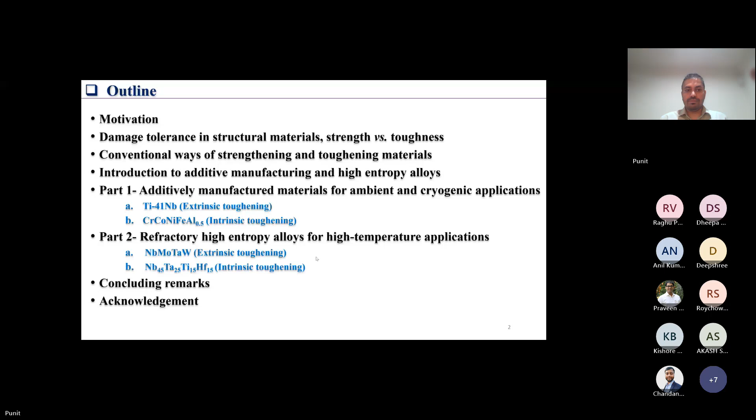So why do we want to discover new structural materials? What are the requirements and applications where we need these structural materials, where existing materials are not sufficient?

If I want to give an example of a cryogenic temperature application, one of the foremost would be rocket engines, which operate at cryogenic temperatures because you need to store both oxidizers and fuels below their boiling point. For example, methane has a boiling point of about 111 Kelvin, and oxygen has a boiling point of about 90 Kelvin. At the same time, these fuels also apply some pressure on the fuel tank.

If you are making a fuel tank of rockets or cryogenic engines, you need to store fuel at really cryogenic temperatures. So the structural material should be able to withstand those cryogenic temperatures as well as the pressures. Other than that, if we want to use green hydrogen, the most efficient way to store and transport it is also in liquid form. So that's going to be a popular place where we need structural materials which can survive cryogenic temperatures.

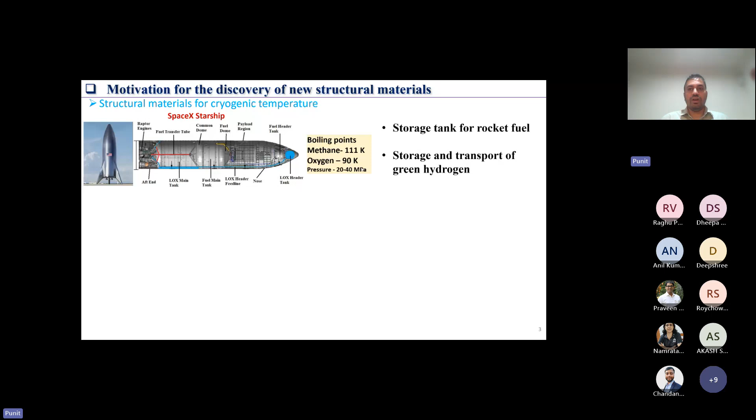Even recently, Rolls-Royce is trying to develop jet engines that use green hydrogen, and they've realized they can only store these fuels at cryogenic temperatures for the most fuel efficient jet engines. So they're also looking into structural materials which can survive both cryogenic temperatures and embrittlement from hydrogen. The second example I want to give is about high temperature structural materials, and the foremost example of that would be the jet engine.

Most of us know that if we run the jet engine at higher temperature, the hotter the better, the jet engine will be more fuel efficient because of the Carnot equation. If we look at the development of materials used in jet engines, in the beginning we were able to discover newer structural materials that could survive more and more, or higher, temperatures.

Because of that, we were able to follow this line of ideal performance. But in the last 50 years, the better engines we've developed have come through cooling technologies, such as internal channels or thermal barrier coats, not through new materials, so there is an inefficiency loss. If we want to reduce this inefficiency loss and develop fuel efficient jet engines, we have to come up with newer structural materials that can survive these extreme temperatures.

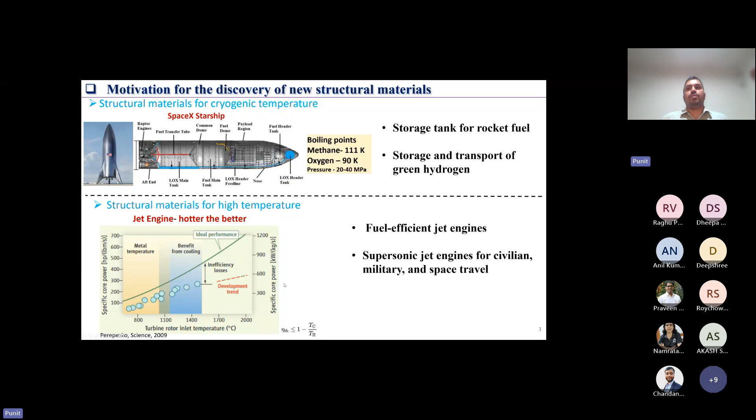So these structural materials would also be suitable for supersonic jet engines, which can be used for civilian, military, as well as space travel. So if we want to develop structural materials for these extreme conditions, what do we need in these materials?

These materials should be damage tolerant. When I say damage tolerant, what does it mean? It means the materials should be strong, which means they should be resistant to plastic deformation, and these materials should also be tough, which means they should be able to resist fracture.

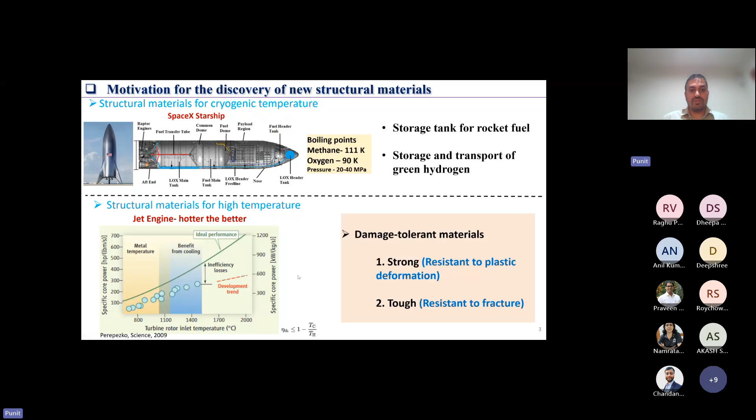So if we talk about fracture, or how materials fracture, we can take the basic idea of the Rice and Thompson model, where they say that if you have a crack and you apply stresses at the crack tip, and in that case you break an atomic bond ahead of the crack tip, it means your material will fracture, or the crack will grow inside the material. So this is the basic idea of fracture.

But if we look inside metals and alloys, and extend the same model to these materials, when you apply a stress at the crack tip, instead of breaking an atomic bond, you emit a dislocation from the crack tip, or if you have a dislocation source ahead of the crack tip, it will emit a dislocation that ends on the crack tip. When you emit a dislocation, or have dislocation activity at the crack tip, your crack tip becomes blunted, and you need to apply even higher stresses to grow the crack.

So this is the origin of the strength versus toughness trade-off that we usually see in metallic materials. For example, if you have materials with higher yield strength, it means you will have lower dislocation activity at the crack tip, and that means lower fracture toughness. At the same time, materials with lower yield strength will have more dislocation activity at the crack tip, and those materials will have higher fracture toughness.

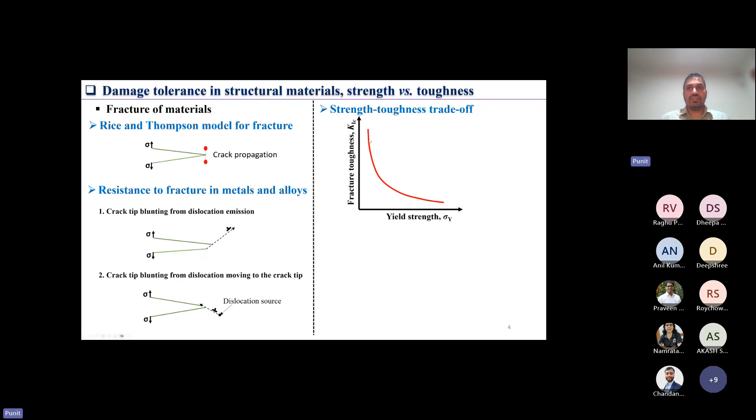We can also divide these further into two broad categories. There are many exceptions, but broadly we can divide into BCC alloys, because the material is not close packed, nucleation or movement of dislocations or other defects is slightly more difficult compared to FCC materials, and that's why these materials have higher yield strength but lower fracture resistance.

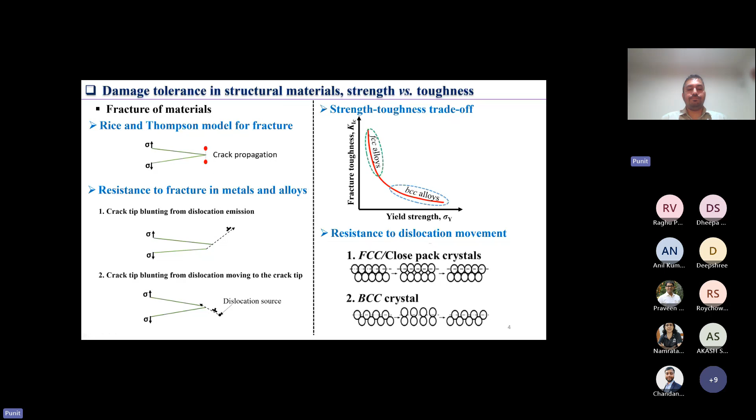At the same time, FCC alloys, which have these close-packed crystals, in those materials it would be easier to nucleate and move dislocations, and that's why we have higher fracture resistance but low yield strength. So if we talk about conventional ways of developing new alloys, or alloy development, there are different types of alloys we want to develop.

So if we want to develop FCC alloys, the strategy we need is to increase their yield strength without affecting the fracture resistance.

Conventional ways of achieving this: the first one I want to highlight is precipitation strengthening. What you can do is put precipitates inside the material, which can block the movement of dislocations, and you can increase the strength of the material.

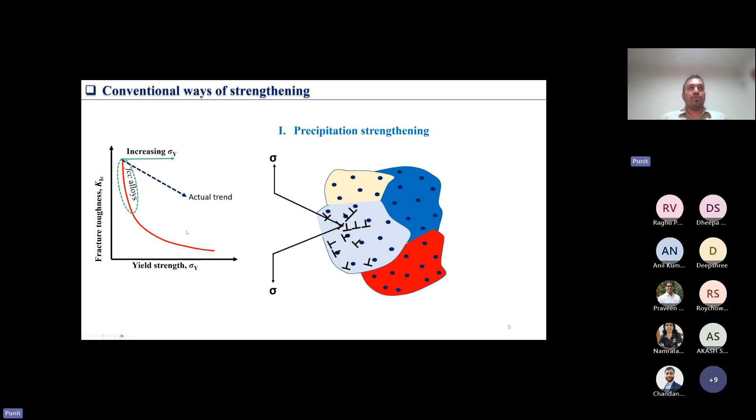But at the same time, if you have a crack inside these materials, these precipitates would also block the movement of dislocations. Because of that, you want to achieve this type of property improvement, but the actual trend is that while you increase the yield strength, you also see losses in the fracture resistance of the material.

The second way we can achieve strengthening of FCC alloys is through grain refinement via material processing. There are two possibilities here. For example, your grain boundary can block the movement of dislocations, which increases the strength through the Hall-Petch mechanism.

At the same time, you can nucleate a different slip system in the neighboring grain, and by doing that you can spread the deformation, plasticity, or damage away from the crack tip through this route. This usually happens if you have grain boundaries that are low angle grain boundaries.

In comparison, if you have grain boundaries that are high angle and don't allow transmission of dislocations across the boundary, or activation of newer slip systems in the neighboring grain, in those cases you might be nucleating micro voids on the grain boundary. So there are two possibilities in this case.

You can in some cases improve the yield strength without significantly affecting the fracture resistance, but in some cases you will be affecting the fracture resistance. Also, it's very difficult to control the characteristics of grain boundaries through existing metallic processing we have. So that's another challenge when we want to design newer materials with higher strength and higher fracture resistance.

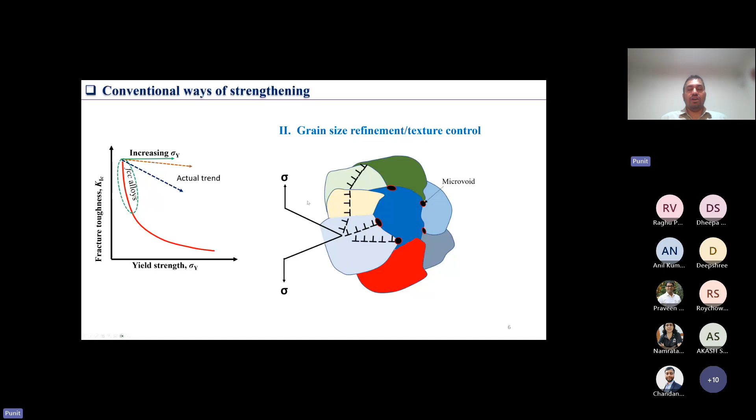In case of BCC materials, what we want to do is increase their fracture resistance without affecting the yield strength. There are usually two ways we can achieve this in BCC materials.

We can have extrinsic toughening from tortuosity of the crack path. Usually BCC materials fracture by cleavage fracture or intergranular fracture, and if you have a crack path which is tilted or twisted, you can have higher fracture resistance in this material.

Although these improvements in fracture toughness from extrinsic mechanisms are not as much as what you can achieve through intrinsic toughening. So in BCC alloys you can also have some intrinsic toughening by compositional modulation that can allow defect nucleation or movement of defects.

For example, in tungsten, if you add more and more rhenium, you can ductilize tungsten. So those mechanisms also work in improving fracture resistance of BCC materials, but the problem is that you will also be affecting the yield strength of these materials.

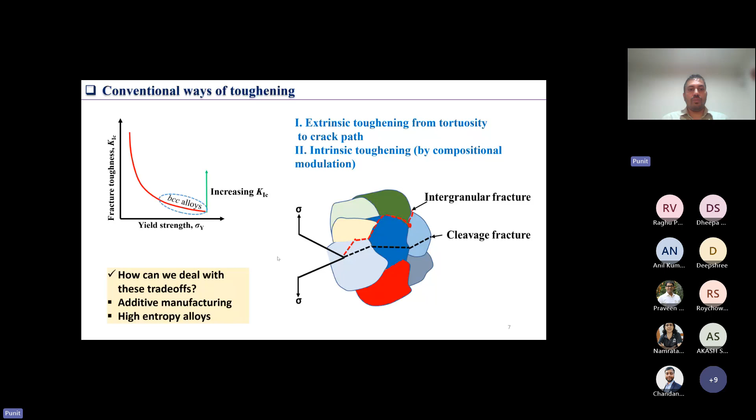So what I want to talk about today is how we can deal with these trade-offs using relatively newer technologies such as additive manufacturing or high entropy alloys. This is where I want to briefly introduce these two topics before getting into the main body of my presentation.

The method I want to talk about today for additively manufactured materials is the laser powder bed fusion process. I'm aware most of you might already be familiar with this.

Most of you might be aware of this methodology, so I will briefly go through this additive manufacturing process.

In laser powder bed fusion process, you take a laser beam and melt the material line by line, layer by layer, building a 3D part. You have a powder delivery system where you spread the powder on the powder bed, and use a scanner to selectively melt the material, getting a final 3D component by lowering the powder bed layer by layer.

There are several process parameters that are important in this additive manufacturing process. For example, laser power, how much power you are giving to the material during the process, decides how much material you are melting in each line.

Another processing parameter is layer thickness - the thickness by which you are spreading the powder and melting the material in each layer. Then there's hatch spacing, which is the spacing between two subsequent lines of the laser scans.

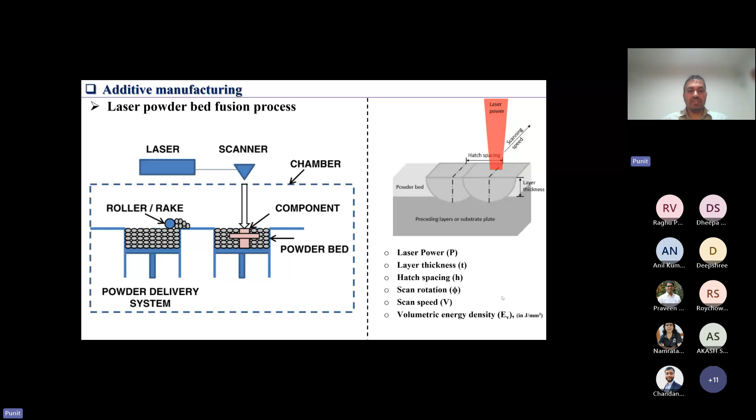There is a parameter called volumetric energy density, which is a combination of process parameters: laser power divided by thickness, hatch spacing, and scan speed. This has units of joule per millimeter cube, and is usually used for reducing porosity or optimizing the density of additively manufactured materials.

There are a few possibilities during additive manufacturing, and I want to talk about the ways we can control the microstructure during the additive manufacturing process. I've divided it into two parts.

The first part I refer to as direct effect. Essentially, additive manufacturing is a building process where you are melting the material line by line, building each line and each layer to get a final 3D part. When you have this building process, you have a signature of this process, which comes from the melt pool formed when melting the material - this melt pool can have a signature effect. For example, this is an image of titanium 64.

In this case we were using a scan rotation of 90 degrees, and because of that you can see the scan overlapping after each subsequent layer. Because of this you can have long columnar grains, and on top you can see the microstructure reflects your hatching strategy. This kind of microstructure is what I'm referring to as mesostructure, and it's a signature effect of the building process we are using.

The second effect I would talk about is the indirect effect. In additive manufacturing, you use a high power laser beam and melt a small volume of material. Because of that you have a very high thermal gradient and very fast cooling rate, and the material solidifies by forming a cellular structure - the growth of this cellular structure depends on the direction of the thermal gradient.

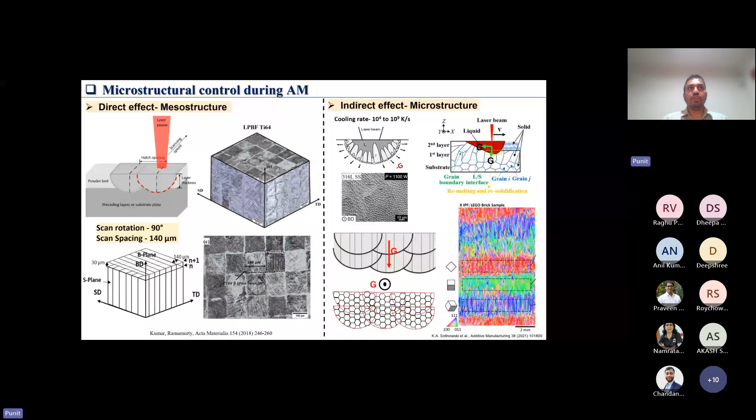Coming to high entropy alloys - the idea behind high entropy alloys is that you take multiple principal elements, and if you mix them, you have several possibilities.

For example, you can end up with intermetallics and solid solution, or you can have multiple solid solutions. There is a possibility of spinodal decomposition also, but you can also end up with single phase solid solution. This essentially happens when your delta H of formation, the enthalpy of formation of the compound, is lower than the configurational entropy that you increase by mixing multiple principal elements in large amounts.

From this formulation, we usually refer to this single phase solid solution as high entropy alloys. But if you have possibilities of forming compounds, with a higher delta HF, then instead of a single phase solution, you might end up with intermetallics and solid solution. So essentially high entropy alloys are not only high entropy alloys, they are also enthalpy stabilized alloys, where you have to carefully select these principal elements so that the enthalpy of forming these intermetallic phases is also minimized.

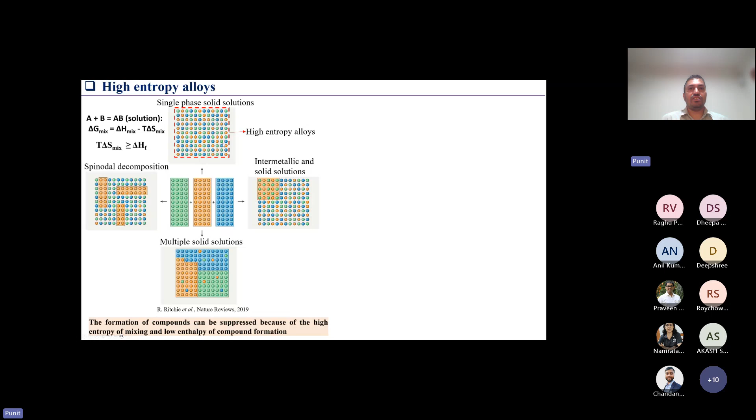So while we refer to these materials as high entropy alloys, because it has become very popular, essentially you are lowering the chances of having these intermetallics with a higher enthalpy of formation.

So why are high entropy alloys special? There are many reasons people will give you, but I want to go through the reasons which I think are quite interesting and quite popular.

The first one is when you are mixing multiple principal element alloys. Earlier in conventional alloys, we were looking at the corner of the phase diagram, and now because we are mixing large amounts of these principal elements, we are in the center of the phase diagram. So it opens up a large compositional space for us to explore and try to see if we can have better materials or newer materials with better properties. This is what gives us the opportunity to do a lot of research in this field.

The second example I want to give is the formation of short range order. Usually when you mix a lot of these principal elements, what you would assume is that you have a quasi-random structure, where, for example here I'm talking about chromium, cobalt, nickel, you would assume these elements randomly choose positions in the unit cell. But in reality, there is a possibility that some elements might like to sit next to each other, or some might dislike to sit next to each other.

For example, in chromium, cobalt, nickel, people have done first principle calculations, and they suggest that chromium doesn't like to sit next to another chromium atom, and you can end up with ordered structures where you have a layer of chromium, then a layer of cobalt and nickel. This way you can have this short range order, and the consequence of this short range order is huge.

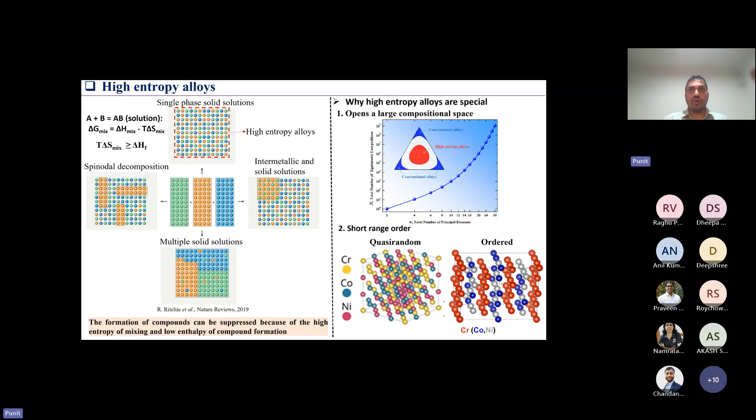So these two examples are what I find really interesting about high entropy alloys.

Getting to the main body of today's presentation, the first part I want to talk about is additively manufactured materials suitable for ambient and cryogenic temperature applications. The first alloy I want to talk about is titanium-41-niobium, a beta titanium alloy suitable for biomedical applications because of its lower elastic modulus. The second alloy is a high entropy alloy suitable for cryogenic temperature applications.

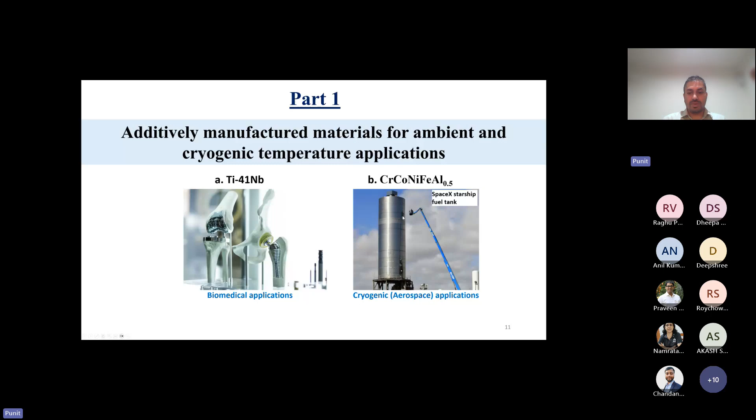When we were printing this titanium-41-niobium beta titanium alloy, we wanted to essentially achieve in-situ mixing, where we took titanium powder and niobium powder, mixed them, and put them inside this LPBF processing unit. We were trying to see if we could form an alloy by melting this mixture of powders.

There is one challenge that comes with that: titanium has a significantly lower melting point compared to niobium. So to melt all the niobium, you have to apply a much higher volumetric energy density inside the material, and when you do that, you might end up with an unstable melt pool which leads to formation of keyhole pores. If you try to reduce the volumetric energy density, you might end up with a lot of unmelted niobium particles, as you can see here. So there is a porosity and inclusion dilemma that you are dealing with.

This is where the PhD student I was working with came up with a brilliant idea. In normal processing techniques, you see the melt pool where the laser beam moves really slowly, and you have a stable melt pool. He came up with the idea that we can input much more energy into the material and still have a stable melt pool if we significantly increase the laser scanning velocity.

When we did that, we were able to significantly reduce both porosity and unmelted niobium particles, as you can see in this example, because we now had this high volumetric energy density during processing of this alloy.

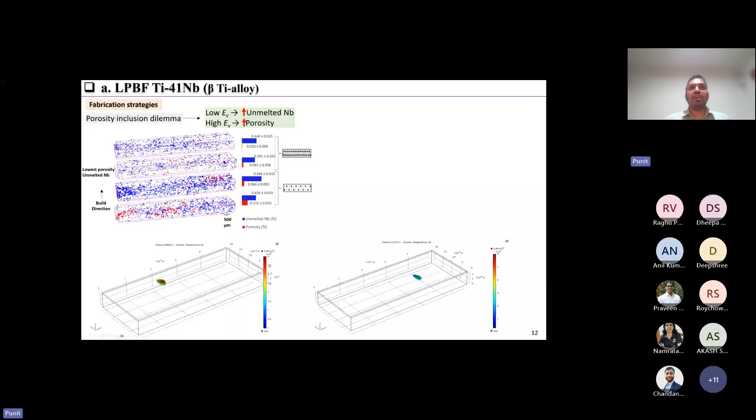Although there was one unintended consequence: if you look at the layers of material we were able to process, you see in the top part of one layer, all the niobium is melted, but in the bottom section of the same layer, you can see some unmelted niobium particles, and this pattern repeats across the layers. Because of this, in one region you have a solid solution with a very high amount of niobium, and in another region, less niobium in the solid solution. So there is a compositional variation from layer to layer because of this processing technique.

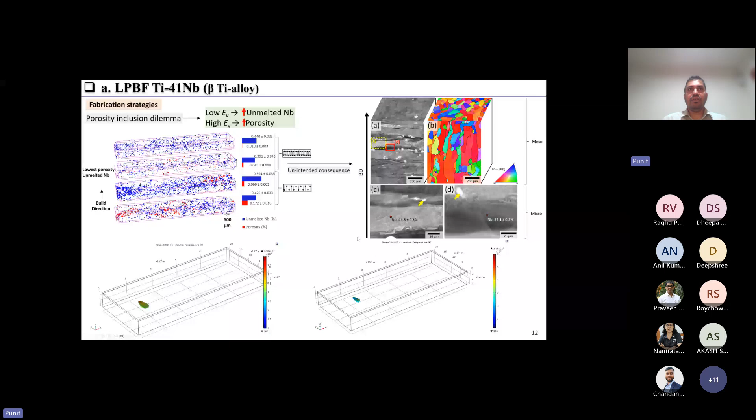We then did some mechanical testing, starting with tensile testing of this material. One thing we observed was that this material showed really low plasticity. It showed higher strength compared to a similar composition beta titanium alloy, but no ductility at all. When we looked at the fracture surface, we saw cleavage fracture, and the side surface shows specific cleavage planes where BCC material usually fractures.

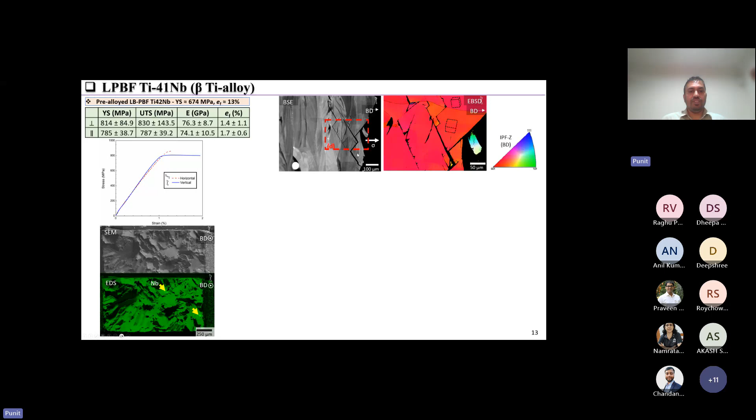So we were trying to understand what is going on, why do we have such poor ductility in this material. We did some TEM and saw large omega particles present in this material. Omega phase forms in beta titanium alloys, and there are several variants, two of which are important.

If you have a small omega collapse extent, you form this structure, and in this case you can have some homogeneous plasticity. But if you achieve a large omega collapse extent, which usually happens by forming isothermal omega when you age your beta titanium, then because of the structure of this omega phase, you get heterogeneous plasticity.

In our material, what happened when we were trying to print these blocks for fracture toughness tests, is that we printed huge blocks, and printing one block was taking almost a couple of days. When you print such large blocks, the temperature of the printed material goes very high, and essentially we were aging our blocks for a long time.

If you age this kind of composition above 300 degrees C, you form isothermal omega, which can cause this effect of heterogeneous plasticity.

We verified this by printing small as-built coupons and doing tensile tests, and we do see plasticity there. We also tried solution treating the huge blocks we had printed, and we found that when you do that, you lose significant strength. That was something we did not want to see.

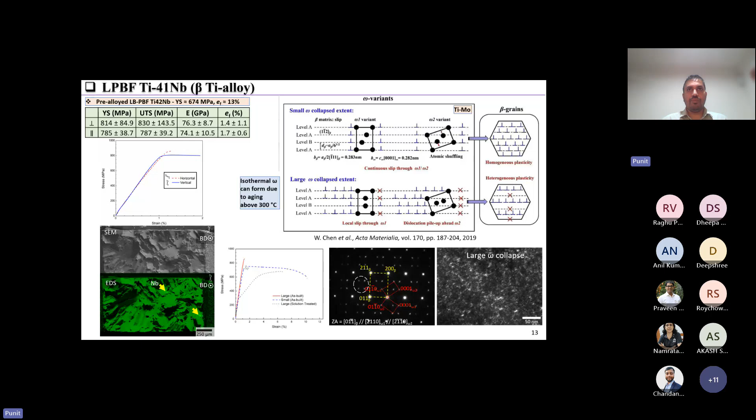So we went ahead and tested these large blocks, doing fracture toughness tests to understand the effect of the compositional gradation in our sample. We took these huge blocks and created notches in different directions to see how they interact with the compositional gradation lines inside the block, oriented differently with respect to the crack path.

In this case, you can see the crack path would not interact that much with this compositional gradation, the lines of this compositional gradation inside the phase. And you can see here the fracture toughness is around 22.6 megapascal root meter. In the other two directions, the fracture toughness almost doubles.

Looking at the fracture surface, we see that in the case where the crack path does not interact with these low or niobium poor regions, there's a lot of cleavage, flat cleavage fracture surface, and that is why the fracture resistance is much lower.

In the other two directions, this is how the niobium poor region is oriented, and you can see when the crack goes through these regions, you have some plasticity. Again here you can see the same thing, these are the lines of niobium poor regions, and you can see plasticity in those regions.

So that is what explains the significant difference in the fracture resistance of this material.

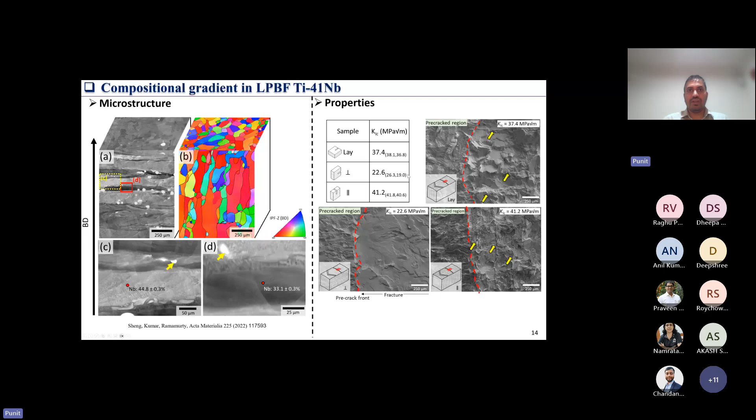Beta titanium alloys with omega precipitates usually show fracture toughness about this value, but because of compositional gradation, we are able to achieve almost double the fracture resistance of these omega precipitated beta titanium alloys. And also during pre-cracking of this material, we see the same thing.

When the crack goes through, it doesn't interact with the niobium poor region, you can see very limited plasticity. In cases where this is niobium poor region, you can see there's a lot of slip bands that form.

What happens usually ahead of the crack tip is you form these slip bands, and the crack propagates through these slip bands, and that's why it goes through this tortuous path.

In this case, when the niobium poor region is perpendicular to the crack growth direction, when it interacts with these niobium particles in these regions, you can see crack bifurcation happening, and that has some consequence on the fatigue crack growth rate also, in terms of how the crack interacts with these compositional gradations inside the microstructure.

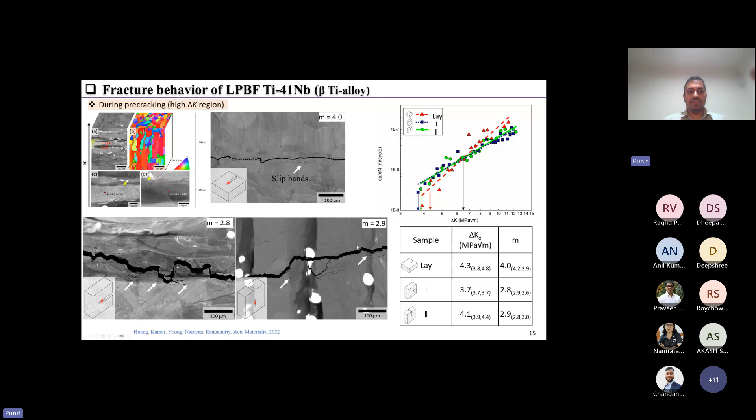So coming to the second part, the second alloy of this project, we wanted to look into this. The idea of this project was to investigate a composition similar to chromium cobalt nickel, and the idea of this project came through this thought process that I want to talk about.

Chromium cobalt nickel is a high entropy alloy which has single phase FCC crystal structure, and it shows extensive strain hardening, which generates excellent fracture resistance. Even at cryogenic temperature, the extent of strain hardening further increases. Because of that, you have a fracture toughness that ranges from 210 to 270 megapascal root meter.

Although this material shows excellent fracture resistance because of this sequence of deformation mechanism where you have dislocation activity, then you form these nano twins and stacking faults, and because of that you have large crack tip blunting happening, which gives you such high fracture resistance.

The problem with this alloy is that it has yield strength which ranges from 415 megapascal to around 625 megapascal, even at cryogenic temperature, and these strength values are somewhat similar to stainless steel. Stainless steel also has a fracture toughness around 200 to 250 megapascal root meter.

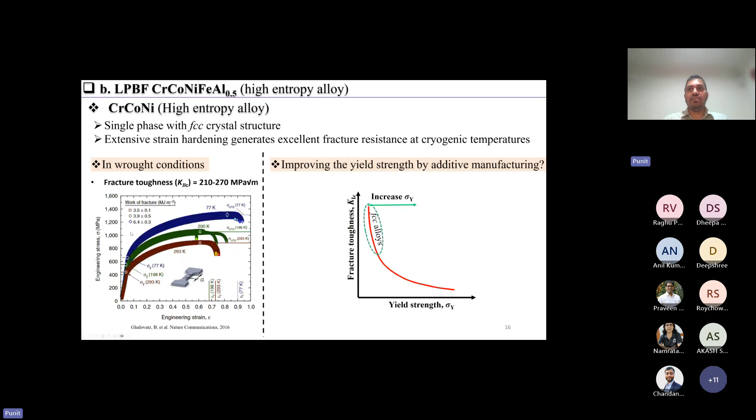So there is no incentive to actually try to use this material which has such a high amount of cobalt, which is an expensive element if you know about that. So the idea was, can we use additive manufacturing to increase the strength of this material without affecting the fracture resistance? This is where we selected this composition, where we additionally added iron and aluminum.

The idea of adding aluminum was that in additive manufacturing you have this huge thermal gradient that I talked about, and you are melting a small amount of material. So because of this combination of high thermal gradient and fast cooling rate, the material solidifies usually into a cellular structure, as I talked about in the introduction.

So when these cells are growing, you have constitutional supercooling near these cells, and because of that you have liquid which is rich in solute atoms. And when you add aluminum, these solute rich areas become really rich in aluminum.

When you have this high concentration of aluminum on these cell boundaries, what will happen is that when they solidify, you might end up forming these B2 phases on the cell boundary, especially in regions with the highest flux of solute rejection, which would be at the cell boundary triple points. In those regions you will have sufficiently high aluminum to form these B2 phases.

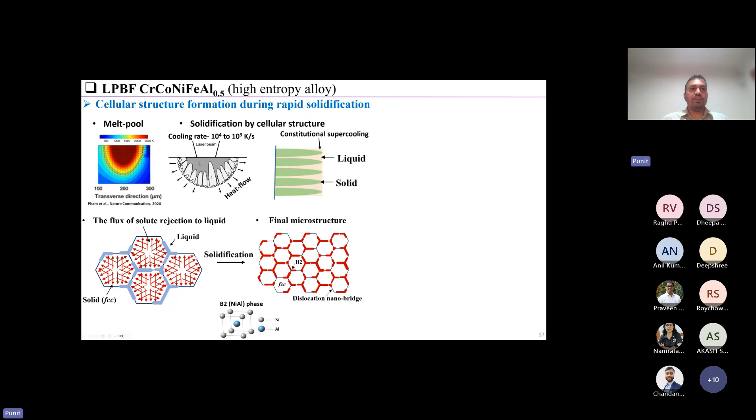In other regions, you also have segregation of aluminum, but it's not sufficiently high enough to form this B2 phase. So we end up with a microstructure where cell boundaries are decorated by B2 phase. In regions without sufficient aluminum, these dislocations that form during thermal cycling are trapped.

During additive manufacturing, when printing layer by layer, the layer below gets remelted, goes to really high temperature, expands, and then contracts on cooling. Due to this thermal cycling, you form a lot of dislocations, and the aluminum on the cell boundary traps these dislocations. So you end up with cell boundaries containing B2 phases connected by dislocation nano bridges.

This microstructure that we formed through LPBF processing of this composition, we call it honeycomb microstructure, which, if you look at this pseudo 3D microstructure diagram, you can see it resembles a honeycomb.

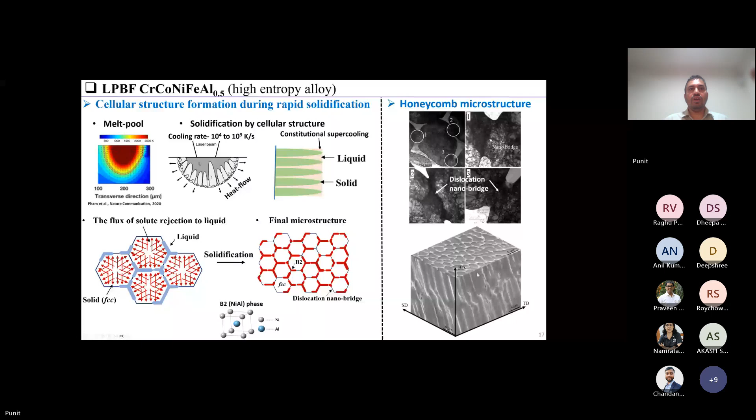So we went ahead and did some tensile tests on this material. When we do tensile testing, we see the yield strength at room temperature increases by 49% compared to the wrought counterpart of this alloy. At cryogenic temperature, the yield strength almost reaches 1 GPa. This is a significant improvement, about 50%.

This improvement in yield strength happens because now the cell boundaries are decorated with B2 phase and these dislocation nano bridges. During low or early plastic deformation, they are able to resist dislocation movement out of these cells. These cells have a Hall-Petch effect that gives such high strength, while still maintaining good plasticity even with improved strength.

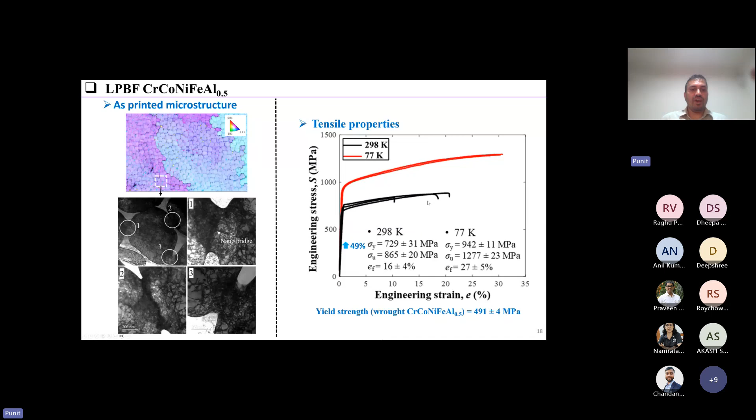In this material, we see fracture toughness is about 300 megapascal root meter at both room temperature and cryogenic temperature. This fracture toughness is actually even higher than what we see in wrought chromium cobalt nickel alloy, which shows fracture toughness about 210 to 270 megapascal root meter.

To get an idea of the extent of fracture resistance in this material, we also did heat treatment to dissolve these B2 phases from the cell boundary, instead forming nano precipitates of B2 phase inside the matrix.

At cryogenic temperature, we see fracture toughness is even more significantly reduced, almost 6 times less. After a certain amount of crack growth, about 0.2 to 0.3, the material fractures by unstable crack growth. So the fracture resistance is significantly lower.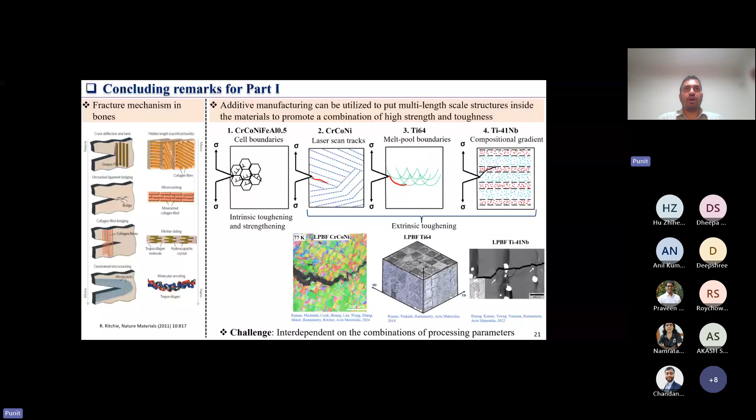So, coming to part two of my talk, I want to talk about structural materials suitable for high temperature applications. Here I have selected two alloys: you take group 5 elements, niobium and tantalum, and then mix them with group 6 elements, moly and tungsten. So the first one is niobium-moly-tantalum-tungsten.

The second one, we are again taking group 5 elements, but mixing them with titanium, hafnium, group 4 elements. And if you look at the properties of these two materials, in the case of niobium-moly-tantalum-tungsten, the material shows excellent properties under compression.

And if you look at the strength under compression, you can see this material actually retains about 400 megapascals up to 1600 degrees C, which is far better compared to existing nickel-based superalloys or other high temperature materials.

So you can see while this material shows excellent properties under compression, when we test it under tension, there are really limited studies that exist, because this material is very difficult to process. Since you have all these refractories, you cannot get large chunks of material to do properties analysis under tension.

Although there are some studies investigating single crystal, bicrystal, and nanocrystalline film fracture toughness, those values are relatively much lower compared to FCC alloys. Even in niobium, tantalum, titanium, hafnium, we see a lot of ductility and uniform strain, about 15%, and this material fractures by microvoid nucleation and coalescence. So although half the composition is similar in both alloys, you see a very big difference in their properties. That's why I've selected these two examples to highlight what is going on in this material.

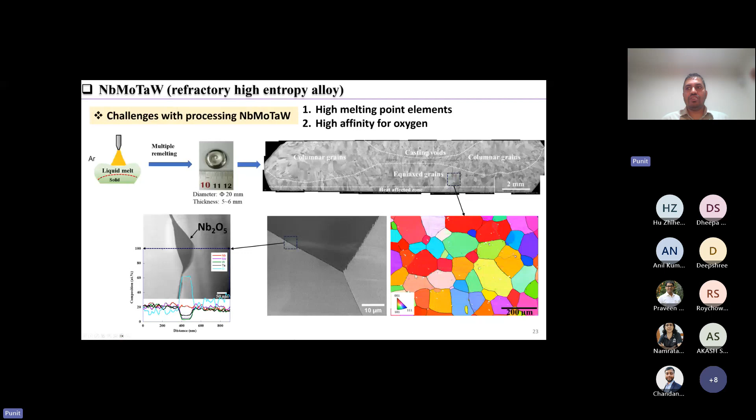So we went ahead and evaluated the properties of this material under tension. Looking at compression behavior, this material shows excellent strength retention up to 1200 degrees C, and there is significant plasticity under compression, as reported by several people.

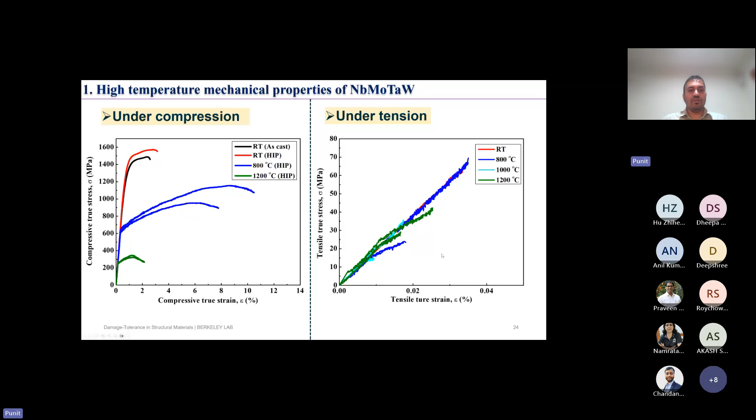But if we look at properties under tension, this is where we see the contrast. The material fails before yielding at all temperatures, and the tensile true stress doesn't go higher than 70 megapascals. Ductility under tension is less than 0.04%—it's abysmal when you test this material under tension.

We had microstructures which are equiaxed as well as columnar grains ahead of the crack tip, so we evaluated the fracture toughness of this material with different microstructures at different temperatures. We found interesting fracture toughness values. At room temperature, from literature data, the equiaxed microstructure shows fracture toughness about 4 megapascal root meter, while columnar microstructure shows much higher fracture toughness at room temperature. But as temperature increases, the fracture toughness of columnar microstructure goes down, and equiaxed microstructure shows higher fracture toughness as temperature increases. This was really interesting to us, and we wanted to understand what was going on.

We looked at the fracture surface of this material, and at room temperature the material fractures by cleavage. With increasing temperature, the fracture mode becomes a mixture of cleavage and intergranular fracture. At 800 and 1200 degrees C, we see complete intergranular fracture, and you can see river marks emanating from the grain boundary. So something is going on at the grain boundary—at higher temperature it's so weak that we get intergranular fracture.

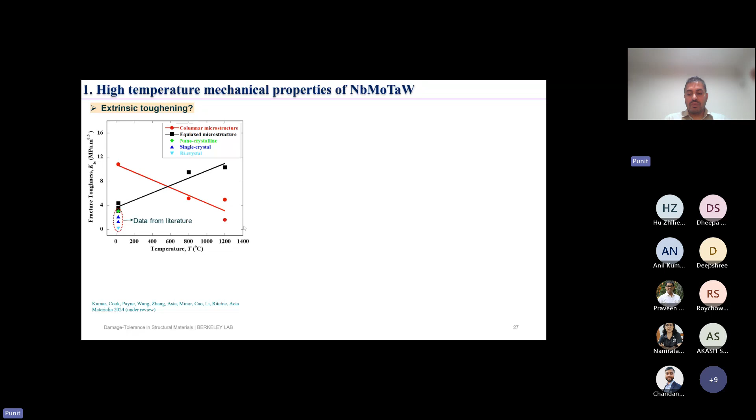Although we were able to understand what is going on with the fracture surface, we still wanted to rationalize the reason for differences in the fracture toughness values. So if we think of fracture at ambient temperature, which happens in transgranular fracture mode, we can think of the Ritchie-Knott-Rice model for brittle fracture of this material.

What the Ritchie-Knott-Rice model suggests is that ahead of the crack tip you have a stress field, and if the stresses from this field are higher than the fracture strength of a microstructural weak point ahead of the crack tip, the material will fracture. In cases where you have high probability of finding these particles, the fracture toughness will be lower.

If we compare these two cases, columnar microstructure and equiaxed microstructure with grain boundary oxide particles, you can see in the columnar microstructure the probability of finding these particles, which are the microstructural weak point for this material, is less compared to equiaxed microstructures. That could be the reason why we see such a difference in fracture resistance at room temperature.

But at high temperature, where you are going through intergranular fracture, for columnar grains the fracture toughness depends on how these columnar grains are aligned with the direction of crack propagation. As you increase the theta value, the fracture toughness or fracture resistance also increases.

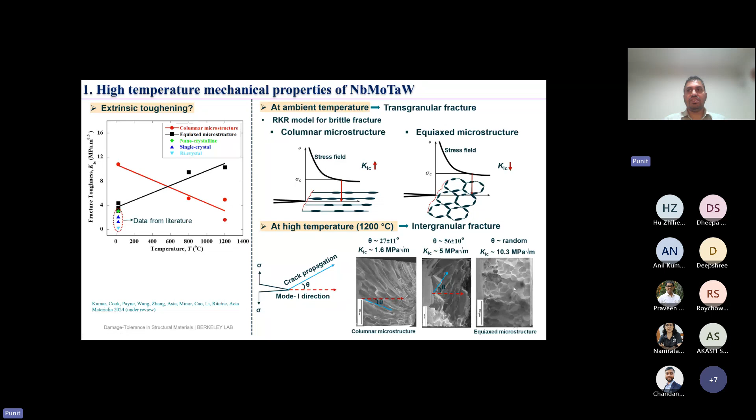Although we have a very poor fracture resistance, we are able to still recover some fracture resistance through extrinsic toughening of this material. So coming to the second alloy, which is niobium, tantalum, titanium, hafnium.

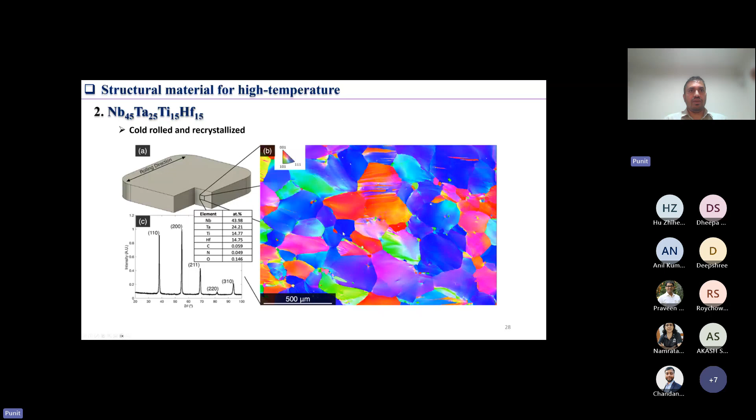This material was ductile, as I talked initially, and it was so ductile that we were able to actually cold roll the blocks of this material, and we were able to recrystallize the grains through heat treatment at about 1100 degrees C. So we went ahead and did some tensile tests on this material.

At room temperature, it shows uniform strain about 15%. Even at cryogenic temperature, this material is ductile, and we see uniform strain about 10%, which is really surprising for a BCC refractory material.

At higher temperature, BCC materials will lose a lot of ductility because of intergranular fracture, as I will show in the next few slides. But we see that this material fractures only after yielding, even at 800 degrees C and 950 degrees C. At 1200 degrees C also we see the material yields before fracturing, and we see strain softening happening here.

So this is the only refractory high entropy alloy so far where we see some ductility, and we are able, even at high temperature, to see the material yielding.

So we can plot yield strength versus temperature and compare this with existing materials. That's what we did. If you look at niobium, tantalum, titanium, hafnium, the starting strength at room temperature is quite low, but the material retains its strength very well up to 1200 degrees C.

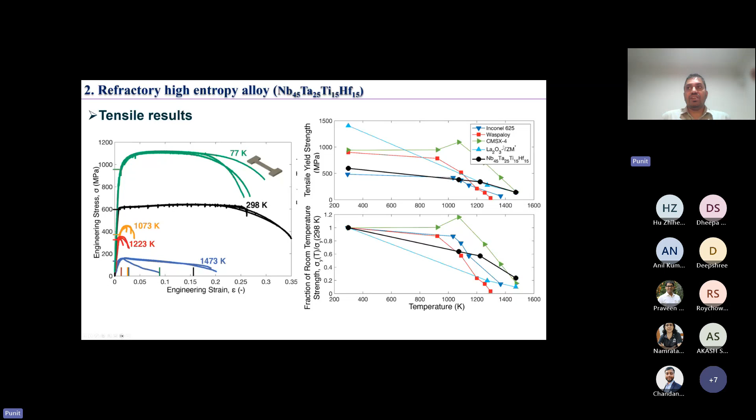Now you can see it's almost comparable to single crystal nickel based superalloy at 1200 degrees C. If you normalize these strength values and compare the strength retention, you can see NTTH actually shows better strength retention compared to existing materials used at high temperature. So this was really interesting.

When we did a fracture resistance evaluation, an R curve evaluation of this material, the challenge was trying to get a valid fracture toughness, because this material shows plasticity even at higher temperature. We had to use the J method even at high temperature, and that's really challenging, because even doing a J test at room temperature is difficult.

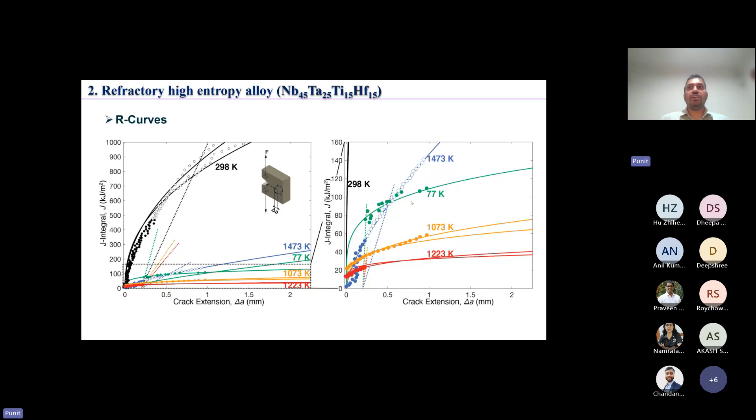If you look at the other temperatures, you can see the fracture resistance, or rising R curve, at all temperatures. Even at cryogenic temperature - usually all refractory materials have a ductile to brittle transition temperature above room temperature - but in this material you can see it's still showing a rising R curve at cryogenic temperature. So it was really interesting to see that we have not actually reached the ductile to brittle transition temperature of this material even at 77 Kelvin.

When we look at the fracture toughness values of this material, we see the fracture toughness KJ1C is higher than 50 megapascal root meter at all temperatures, and at room temperature is even higher than 250 megapascal root meter, which is comparable to FCC materials. This is where all the BCC refractory high entropy alloys or BCC alloys lie on the fracture toughness versus yield strength plot, but you can see this is where NbTaTiHf lies at room temperature. That was really surprising.

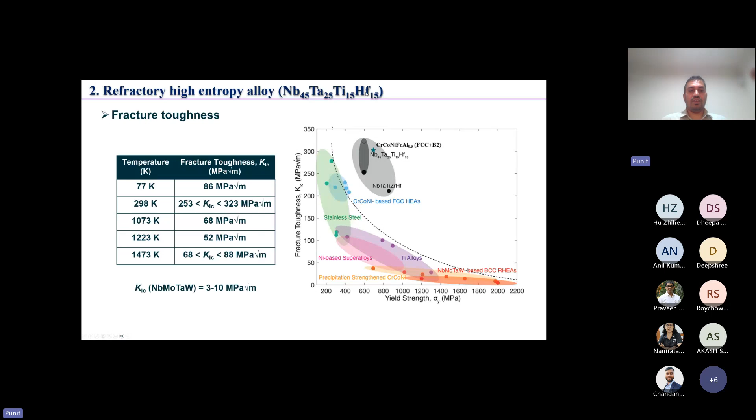If you compare these values to the fracture toughness of niobium, moly, tantalum, tungsten, you can instantly see the difference in fracture resistance of this alloy, which I should mention has almost similar composition - you've only exchanged a couple of elements. So where is this fracture resistance in this material coming from?

To understand that, we took the CT samples and sectioned them from the center to expose the region of high... we're at one hour.

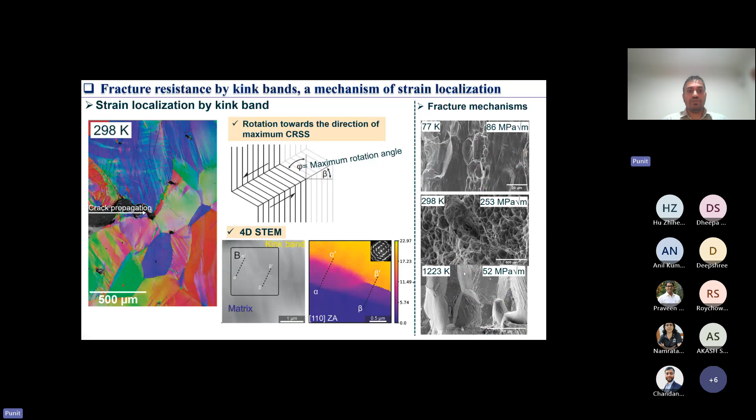So we looked away from the crack tip also to understand what is happening with the deformation mechanism. And in this region, we see presence of both screw, mixed, and edge dislocation. And this is a bit interesting for the high entropy alloy community.

Because people say that lattice distortion in high entropy alloy slows down the speed of the edge dislocation, and we do see some edge dislocation in the material, which suggests that the velocity of edge dislocation has really slowed down. We also saw twinning happening at all different temperatures, so that was also really interesting.

Coming to the conclusion of my talk, the first part where I talked about niobium, molybdenum, tungsten, it shows that refractory high entropy alloys, before we claim that they are the structural materials for future, we need to evaluate their actual ductility and test them in tension. And in some cases, if your material is really brittle, like niobium, moly, tantalum, tungsten, intrinsically brittle, you can improve the fracture toughness by extrinsic toughening.

Niobium, tantalum, titanium, hafnium refractory high entropy alloy is really interesting because it shows exceptional fracture resistance, which is derived from this mechanism which promotes strain softening. Kink band formation is a strain softening mechanism, and it gives you really high fracture toughness.

And this is really opposite to what we see in FCC high entropy alloy, where you have this extensive strain hardening, which resists nucleation of these microvoids and gives you high fracture resistance. In this case, you have a strain softening mechanism, kink band formation ahead of the crack tip, which is able to spread the damage away from the crack tip and give you a high fracture resistance.

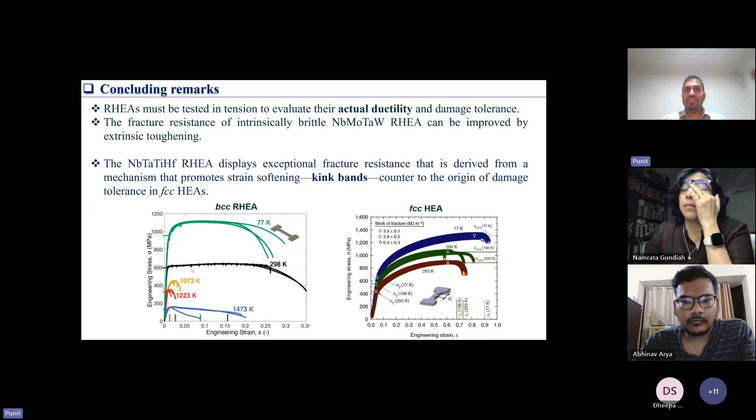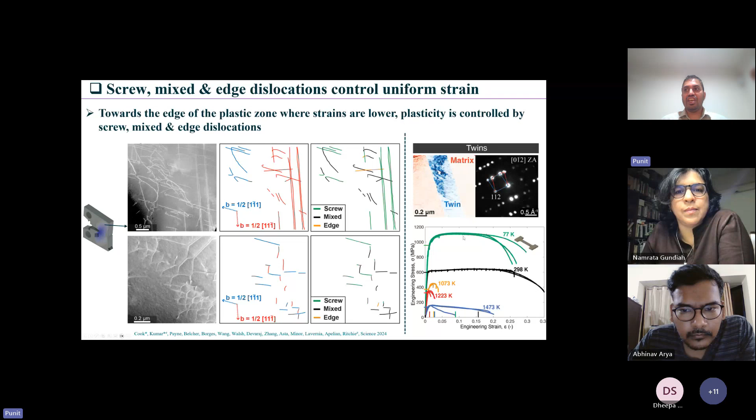So what we think from our theory is that if you look at the dislocation activity, in the region where we see uniform strain, the strain hardening is driven by this dislocation activity. Once you reach these regions, you start nucleating the kink band. Now your material starts necking, and this region is driven by kink band formation. So we believe that uniform strain is driven by dislocation interaction, but necking is driven by kink bands during tensile deformation.

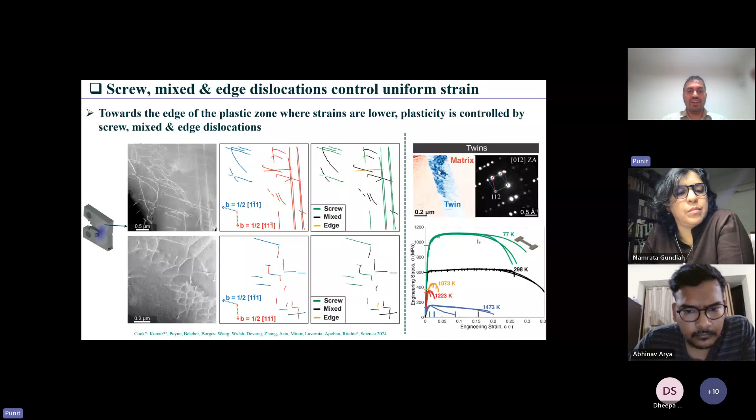But in case of fracture, when you have a crack tip, the mechanism becomes really interesting, because now you can nucleate a lot more kink bands. Usually kink bands have been investigated in single crystals and nanowires, where you see some kink bands forming and that's where strain localizes. But in this case, you can nucleate a lot of kink bands in the same grain, and kink bands also interact with each other, like one kink band ending on another kink band. That's happening because it's related to the atomic level mixing of the elements we have done in this case.

Thank you. One more question I have. In the first part of the talk, you showed that honeycombs, because of that honeycomb structure, were getting good mechanical properties. But if we look at the 3D structure, it was kind of a columnar microstructure. So in the other orientation or direction, was there any loss of the properties or loss of mechanical strength?

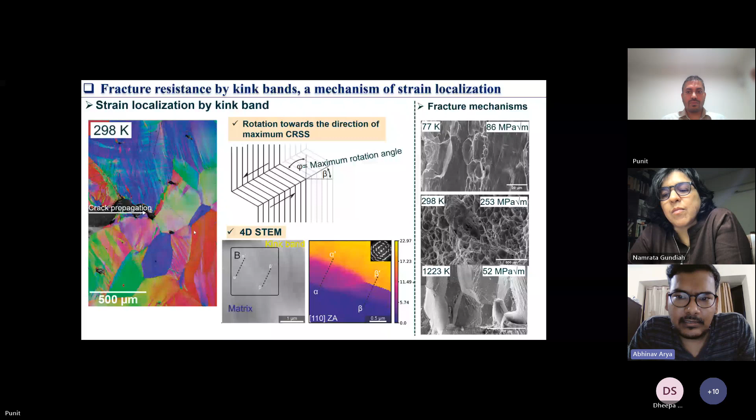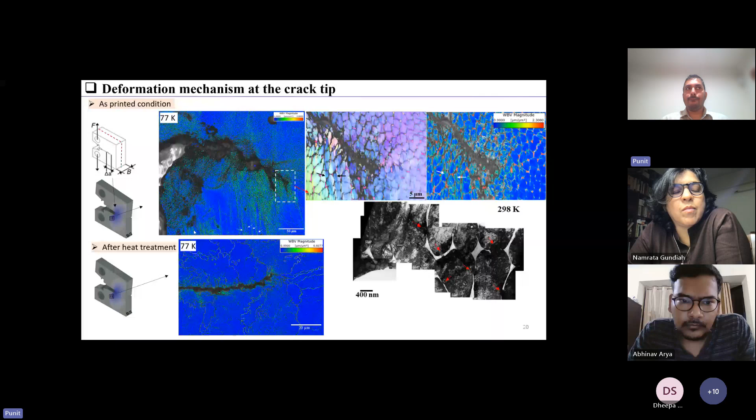That's another very good question. If you look at the honeycomb microstructure I showed, let me go back to that. The dimension of this honeycomb is really small. Essentially this picture is from one grain, and inside a grain, the honeycomb grows like rods. But if you have different grains, the orientation of these rods would be different. So it's not like we are testing long columnar rods in one direction.

But you are right, there would be some effect if we tested in another direction, because the material is highly textured. But we have not done the tests in the other direction, we have just tested in one direction. Oh yeah, thank you.

There's another question in the chat box along the same lines of the honeycomb structure from Dr. Chandan Kumar. He says, in the honeycomb structure, the material fails at the grain boundary. What heat treatment did you choose so that the B2 phase migrated inside the grain?

I'm not sure what Dr. Chandan means by material failing at the grain boundary. We don't see that, but if Dr. Chandan is still there, can you please unmute yourself and clarify what you mean by that question?

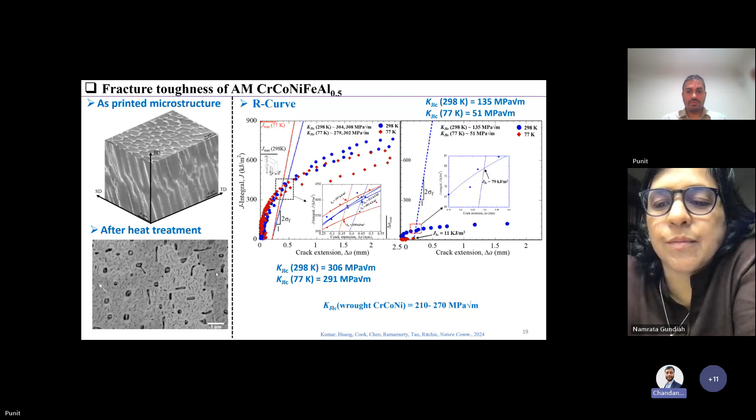I was asking like this, during the cryo test, in the fractograph you have, it fails on the grain boundary, meaning at the B2 phase boundary.

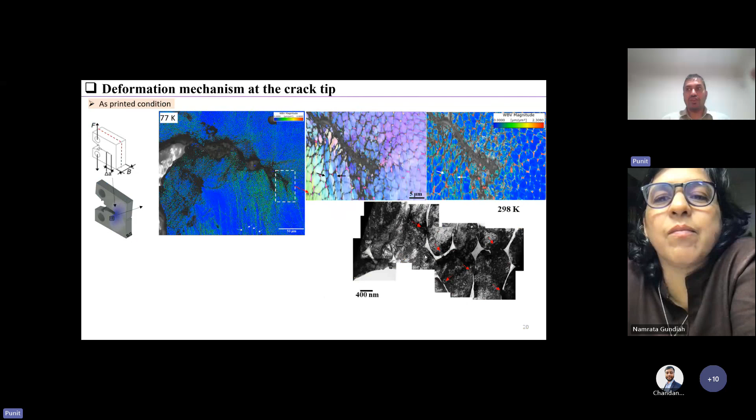I don't think I've shown that it fails on the B2 phase boundary. I haven't shown a fractograph. It doesn't fail on the B2 boundary because there is no large difference between the strength of the B2 phase and the matrix. So the deformation actually happens in both, mostly in the matrix, but we don't see such strain localization happening that would cause a crack to nucleate on these boundaries. But that can happen.

Essentially, in the end, that's how the material will fracture, after a lot of deformation that the material induces before the crack nucleates on the B2 phase boundary. We were able to achieve this microstructure during the heat treatment. This microstructure is an FCC material, and it's not really a stable microstructure because we are doing fast cooling during the laser powder bed fusion process. So if we do an annealing treatment at about 700 degrees C for 1 hour, we can essentially dissolve this B2 phase inside the matrix, and form these precipitates by doing fast cooling.

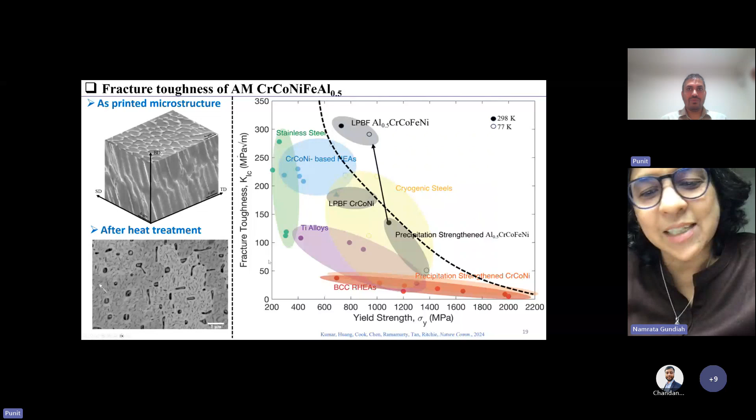So you showed these niobium alloys in part one of your talk, where you showed these columnar geometries, and you had done your studies at room temperature, 800, and 1200 degrees Celsius. There was one more plot after this where you showed the changes- yeah, this one, let's stay here. No, the previous slide please. This one, yeah here. So I was wondering, if you look at it, the fracture toughness- I assume this was one sample that you tested at 800 and 1200, right? And you probably kept it for some amount of time. So there looks like there's a lot of variance in your data at 1200, and there's not much difference between 1200 and 800, although you draw this line like so. Do you want to comment on what is the role- and you also showed these lovely TEM data, very nice videos of how those structures changed at high temperature. So what do you think is the role of equilibrating the material over longer time durations? Let's say time is a factor- how much of a role do you think the changes, like this very sharp curve you're showing, play? Do you think the variance could become even more different at these temperatures, so you might not find much change between room temperature and high temperatures?

Yeah, I think that's a really nice question. If you look at the fracture- I think you are right about not having enough data to actually comment on how different it is. But basically why we were doing that is because if you look at these data values, at room temperature we got a similar data value to what we get in nanocrystalline materials for fracture toughness. And if you compare- we did multiple tests, 3 tests for the equiaxed microstructure and the columnar microstructure. The challenge with these tests was that we did not know how the microstructure ahead of the crack tip looked before we actually fractured the sample and looked at it later on. So we were not able to choose which sample is for which condition.

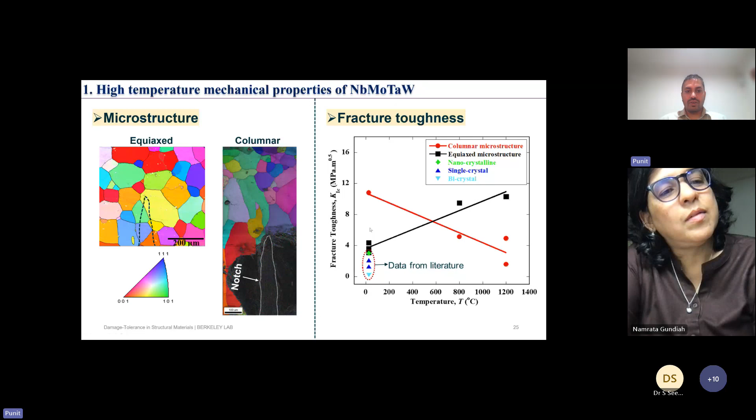We were only able to say post-facto that this sample is for this condition. So that's why we ended up doing multiple tests for certain temperatures, but for certain temperatures we did not have multiple tests. But with respect to values equilibrating when you keep this material at longer time, there was one basic difference in terms of the TEM experiment we did.

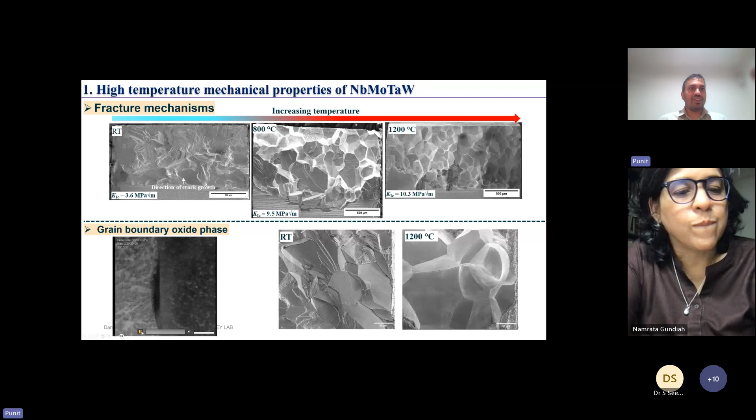In the TEM experiment, we see that these oxide particles actually dissolve around 900 degrees C. So what we did is take some of this material and heat it up to our test condition, about 1200 degrees C, and kept it there for the whole test period without applying any stress, then cooled it down and looked at the microstructure again. We saw there was not much change in the morphology or types of oxide on the grain boundary.

So in TEM, because you have high vacuum and you're using high electron volt electrons, you degas the oxygen from the oxide particles, around 850 or 900 degrees, when a polymorphic change happens. But when you're not applying any stresses inside the material, the oxygen is not actually going out from this oxide phase—their structure changes. We don't have verification of that, but that's our theory: the structure changes, but when you cool down, the structure reforms.

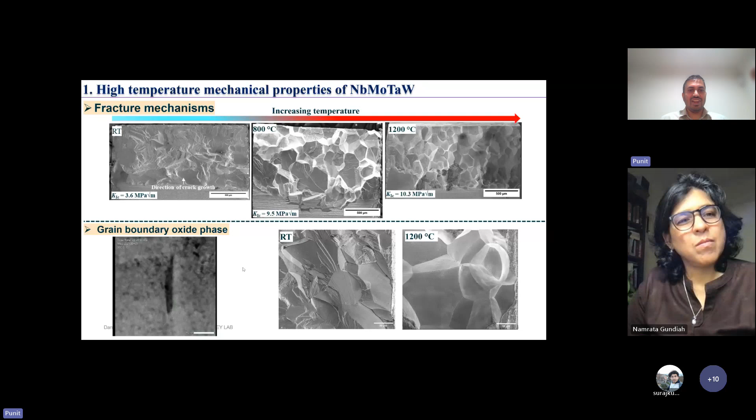Okay, so we were measuring the strain using the extensometer. We had a high temperature extensometer which goes inside the furnace with long ceramic prongs. But because the material fractured in the yield region, we were not able to get really significant data from that extensometer. So we just used the load line displacement for those strain values, but corrected it to the elastic modulus of the material, which we measured using an ultrasonic method—we have small probes you can put on the samples to measure their elastic modulus.

Okay, and if I'm correct, you are doing all these experiments in some inert or vacuum environment, right? Yes, we are doing these tests under argon environment.

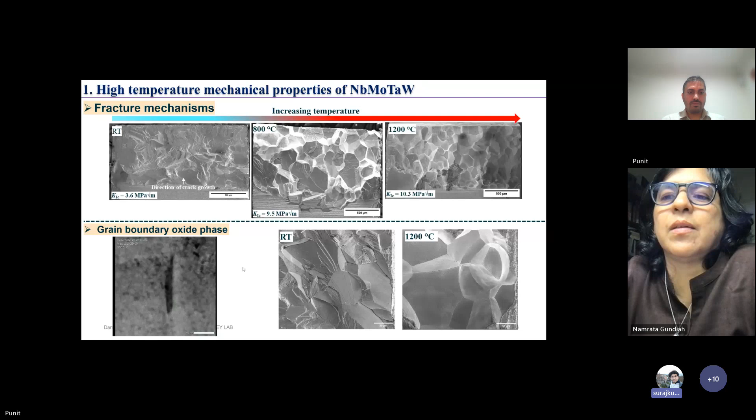So essentially, if you do TEM and want to identify which type of dislocation it is, you have to do this g dot b analysis, which is really involved, where you have to tilt the samples at multiple angles and try to identify the Burgers vector of these dislocations. Because of that, we were not able to do analysis to comment on the statistics of the amount of edge, mixed, or screw dislocation types. We do see these long screw or edge dislocations somewhere, but we cannot comment on the statistics of how much of each forms.

Okay, yeah, that was my question. Okay, thank you. Well, thank you very much.